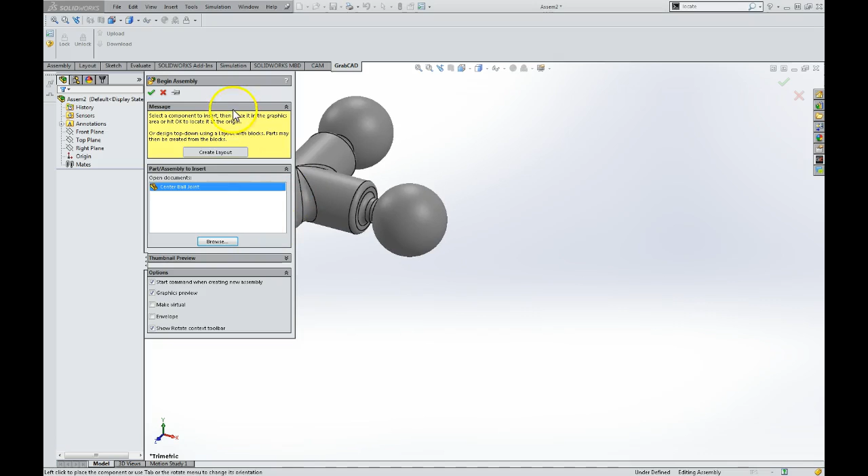SOLIDWORKS is waiting for us to click to place this component in the assembly. However, before we do so, we're going to go to View, turn on the origins. It's going to activate the origin in this part and the origin within the assembly. Now if I hover over the two, they lock together, and we're going to insert this first component right on the origin.

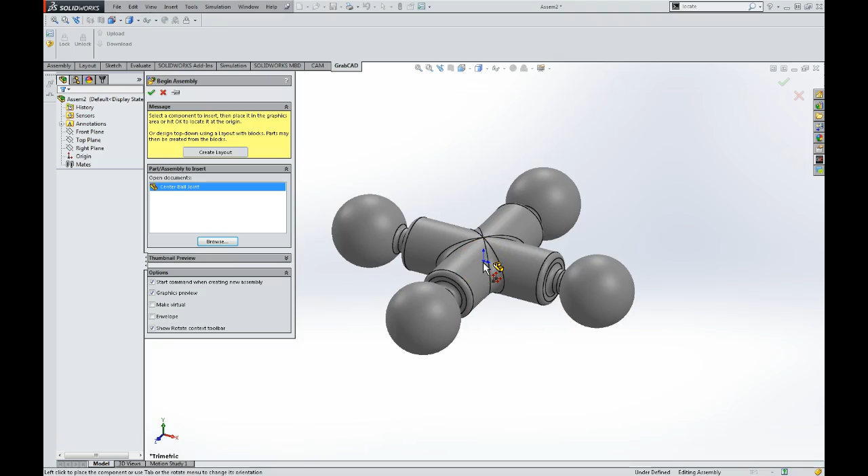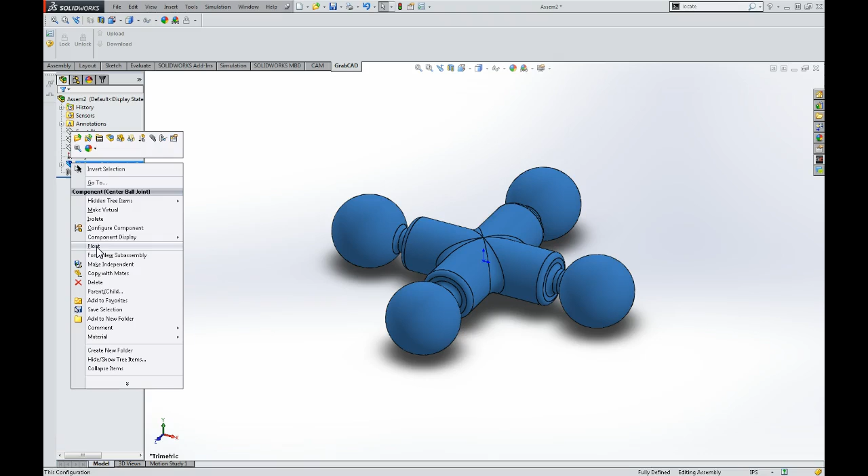So we're on to page 10-4, and we can make this component fixed. Right now by default the first component is fixed. If we go here, we can show that we can make it float if we wanted to.

So we're going to go and insert some more parts under assembly. We're going to go to Insert Component again, go to Browse, and the second part we're pulling in is the ball joint arm. So we're going to bring this guy in and just go ahead and place this here.

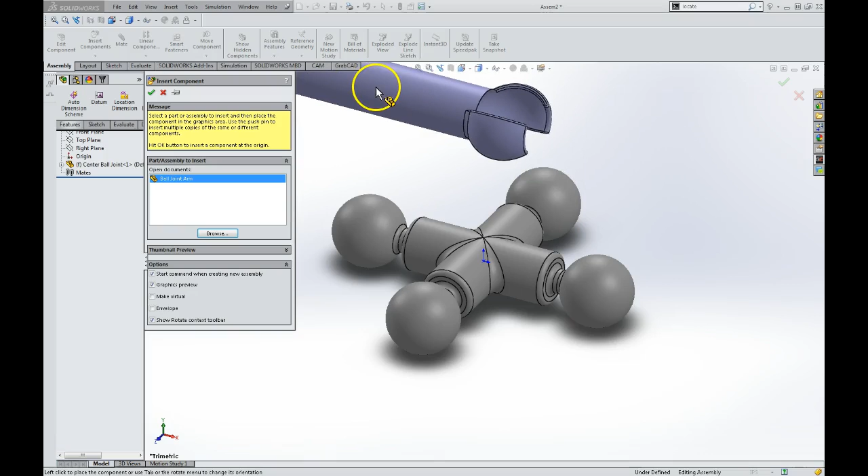Now we're going to go on to mates for these components. And when you pull up the mate command, we have several options available. We're going to select the face of this and the face of this inside, and notice that it's going to automatically put a concentric mate between those two, and those are constrained. So we're going to hit OK.

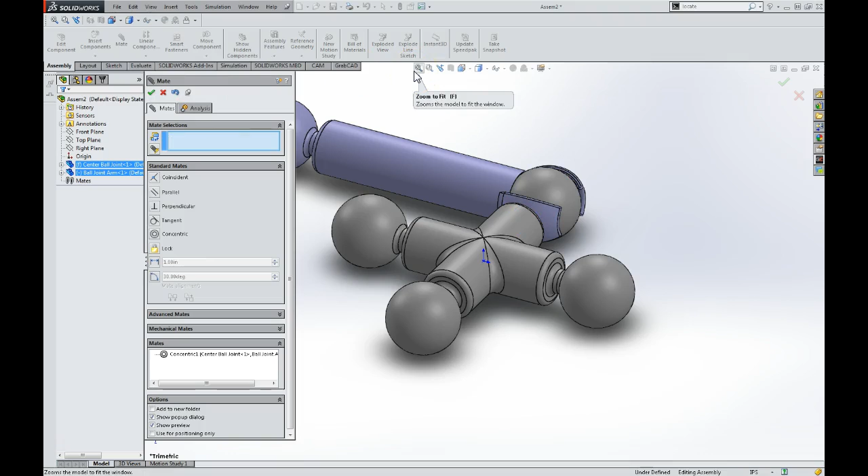If we want to move this component around, we can activate the Move Component command and select this component and drag it around. So we're just going to drag from here and try to create something that looks similar to what's shown. We're in the free drag mode.

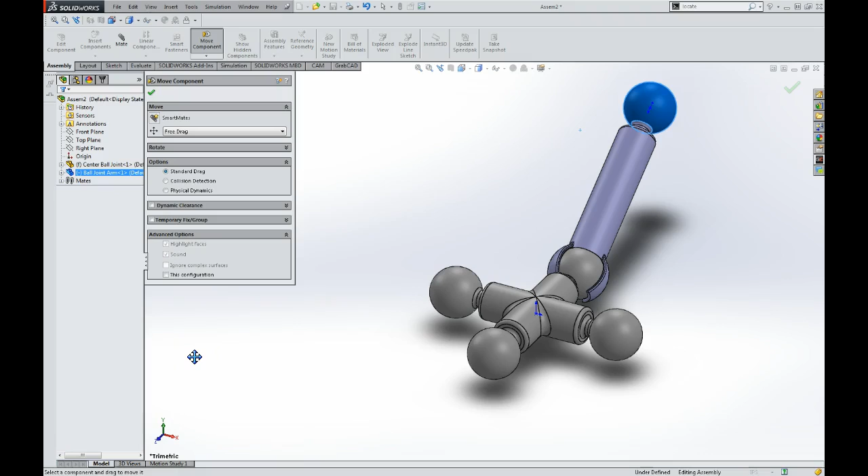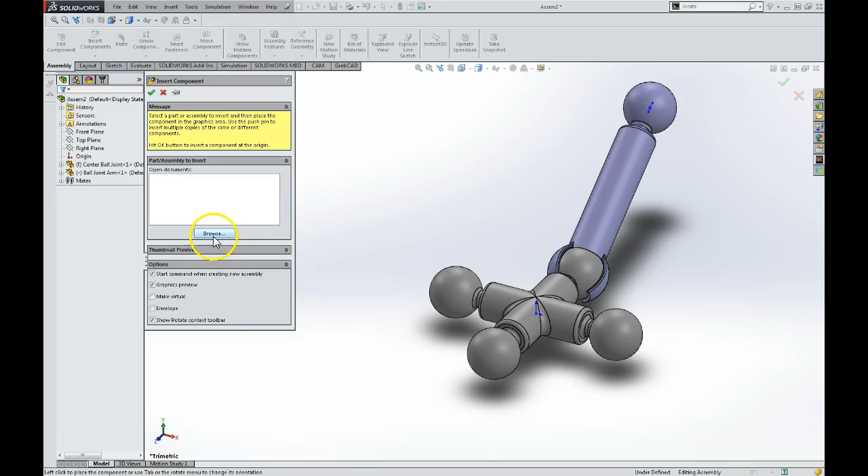Now we're going to insert another copy of this same part. So we're going to select Insert Component. Hit Browse again, and we're going to put another copy of this ball joint arm in. In this case, we're going to go back to Mates and select these two surfaces and lock those together. Hit OK.

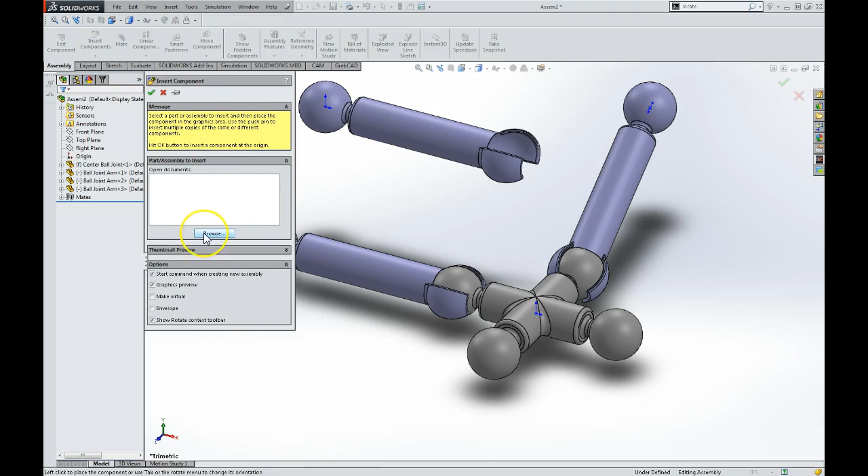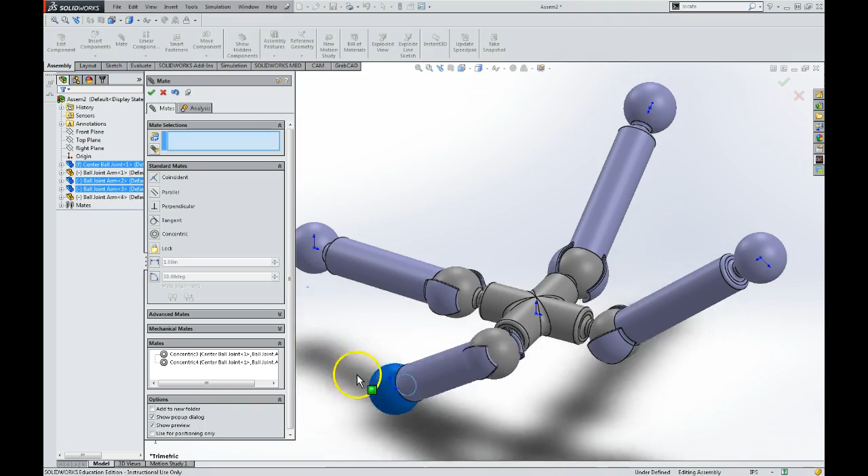And we need to do that a couple more times. So we can go to Insert Component again. I'm going to pull another one in right away. And now go to Mates and make these connections.

Next component is adding this T-joint component. So we're going to go to Insert, Browse, pull in our T-joint, and we're going to put in another copy of that.

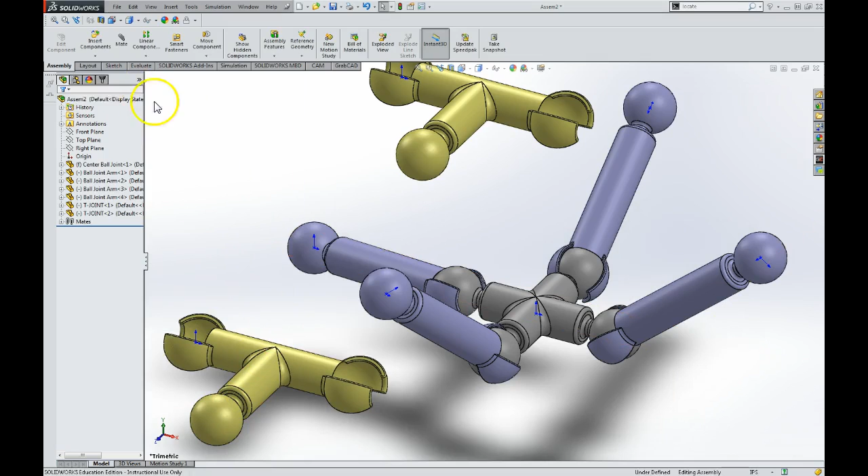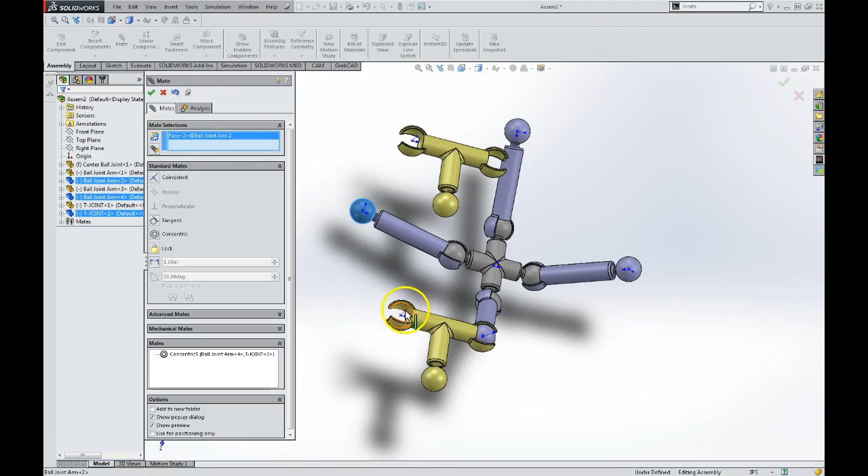And create some mates for these as well. So looks like we can put these two together and select these two and do the same for the other side.

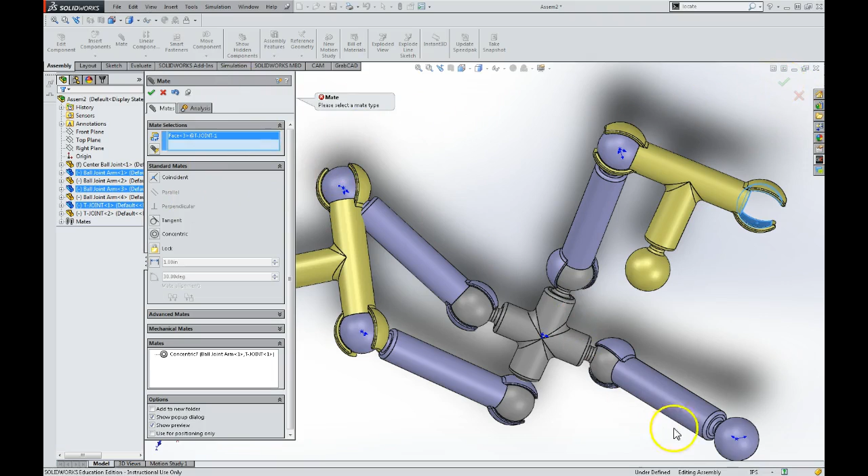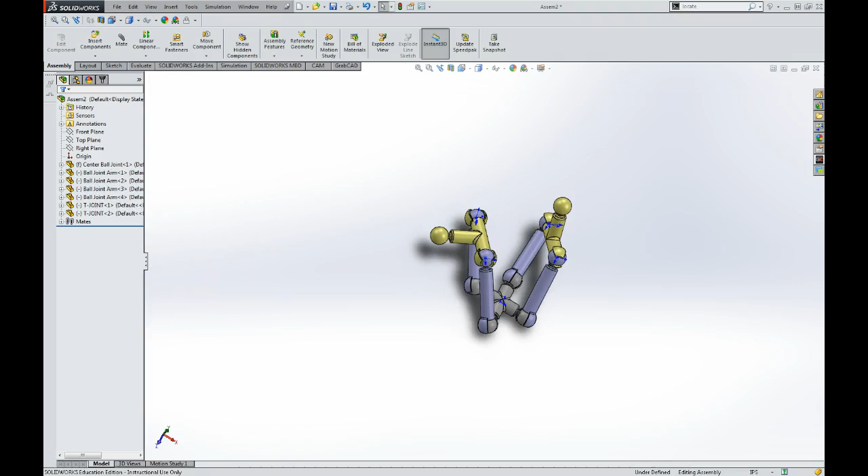Okay, notice that this adds a little bit of limitation to the movement now by adding this additional feature here. Alright, that covers this. We're going to go to File, Save.

Actually, let me do Save As. And this is Chapter 10, Bottom-up Assembly. And I'm going to put my name there.